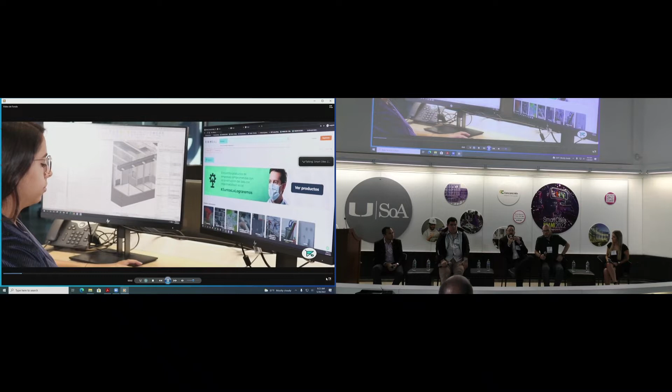So Bimbao is using BIM to be able to, from the beginning of the project, from the design, match the components, the BIM objects, directly with providers and vendors of construction materials. What we do is have a big database of vendors that are continuously feeding accurate and updated information about every material, providing real-time data for decision making. We are trying to achieve a point where even architects and designers are able to impact the process of the design and the result at the end. What we're doing with BIM is integrating the real information that flows through our platform, which is part of it—it's an e-commerce, a marketplace that connects everyone in the design phase. The important thing is that we are connecting everyone from the design phase, so vendors have updated information from the design phase, constructors and general contractors also have information from the design phase, and we're giving the power to architects and designers to help make those decisions with data.

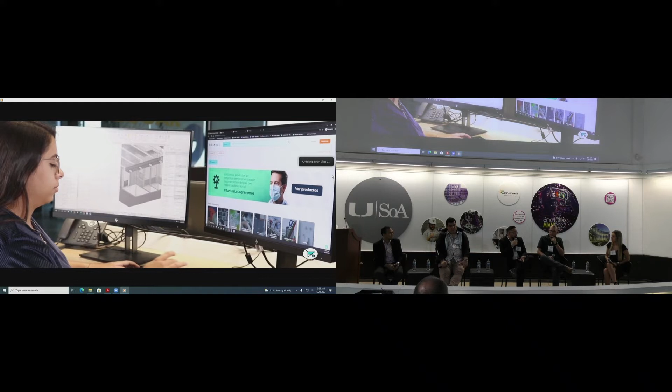I would say that one of the biggest challenges we are facing nowadays is that the quality of the information floating around the web—I'm sorry about the word, but it sucks. It's just not enough for making decisions. We have seen BIM objects that are literally boxes with just height, width, and depth, and that's it. With that information, we just cannot do anything. So it's become part of our mission to improve the quality of information in every BIM project, with high-quality data. And with that data, we are helping everyone in the supply chain make better decisions.

That is very interesting.

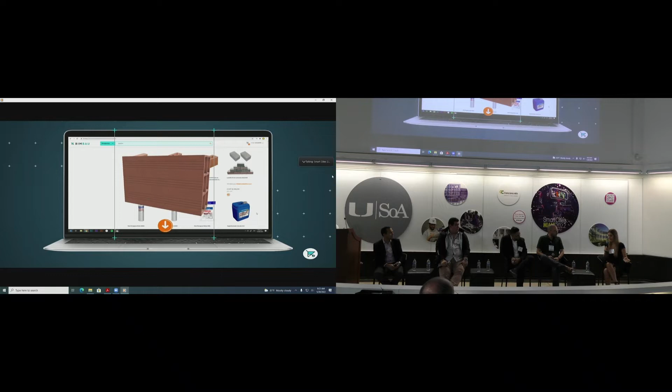When you say you connect everyone from the beginning, and all the parties basically start from the design phase, I wonder, and I want to hear Jaime's opinion on how Forge can be used as a platform on this, and then what are the applications that you see that the industry is adapting to, that Forge can supply and provide, and which ones are they struggling to adapt to?

Yeah, sure. So for those of you that don't know what Autodesk Forge is, it's basically a web service platform that we develop at Autodesk in order to tap into the CAD data. This gives you the opportunity to interact with either construction data, manufacturing data, or even a combination of both. So we have different kinds of services that allow you to do visualization of this CAD data directly into a browser.

When it comes to the digital twin side of it, we know that we can take, for example, a model of an already designed and constructed building, and then just start looking into the data that comes in from a combination with IoT, a combination of machine learning, start learning about how the building itself is behaving in order to let us know and do predictive risk analysis in order to interact more with this data itself. And going back to my previous word into the digital twin side of it, with efficiency, right?

One of the biggest challenges, I guess, that we see now in the industry is, like Bimbao mentioned, the lack of data in some of those objects, but sometimes also the amount of data that a certain kind of object ends up having is way too much, and then we end up with a lot of data that's actually not necessary for the development of it. So I'll say there's a way to keep it simple and then represent all this process directly into a CAD model itself.

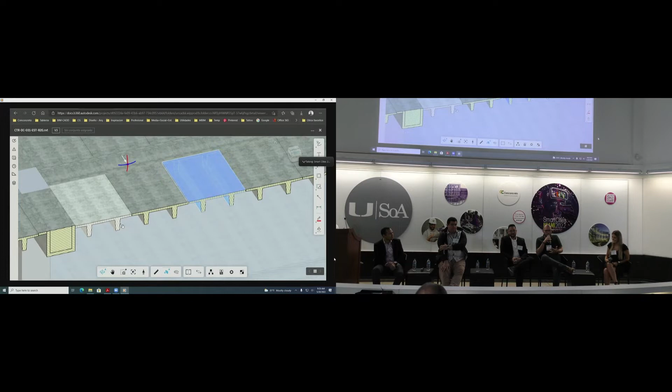Yes, and our biggest challenge with this technology is not about technology. It's about the way we approach the project. This is the important thing about this, because the technology is only tools to take the best decisions for the project. But our biggest challenge is how we approach this project, because normally we don't see the project as a project. Maybe it sounds obvious, but when you think of an architect, this architect is thinking only in his drawings, in the space, in the aesthetics of the building, but doesn't think, for example, about the operation.

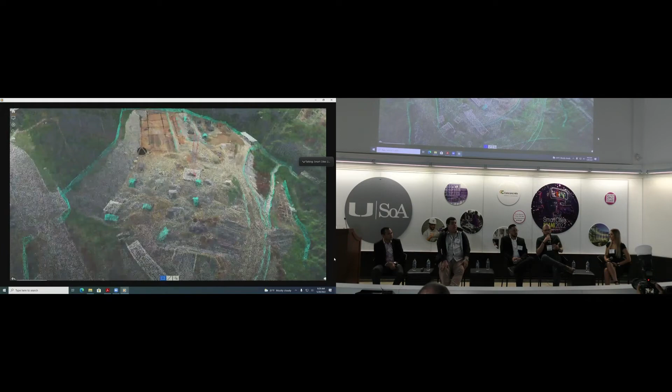Sometimes they don't think about the construction side. And it happens with all the specialists. Every specialist, the mechanical, the electrical, everyone is thinking in his part. But no one is connected. They work as an island, right?

So our biggest challenge is to see the project as a project, because maybe I am an architect, but I have to think about the construction side, about the budget, about everything. Not to be an expert in everything, but my part has a big impact on other parts. So yes, there is technology, but if we don't start to think in these situations, this technology, like Andrew said, is just garbage data, right? We have to start to think in a more integral way around the projects from all these sides.

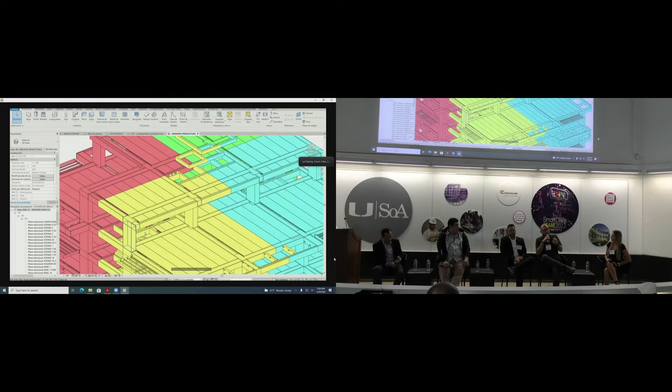I think this is our biggest challenge, yes, to start to approach the project in that way, because only in this way will BIM be more important, because BIM is always focused on the modeling, right? We are just producing 3D models, 3D models, but this is just 3D information. We need to start to focus on the information, because it's this data that is important for the digital twin.

That is very interesting. It sounds like it's just the beginning of something that could be way more connected, which is very exciting for the construction industry, and it's definitely lacking right now.

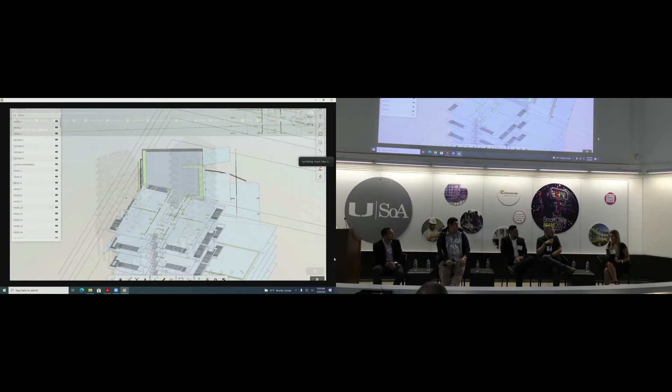Right. So something that all of you mentioned is the word tools, right? How this is a tool. So I want to ask Julio with Autodesk, what are some of the tools that Autodesk either has or is developing to implement more BIM in digital twins? And why should anyone, from the designers, architects, engineers, to the contractor, owner, or even the end user, choose to use them?

Okay, I will start with the common platform. We have been really connected with ISO regarding BIM, and we are really committed to the common data environment. Our first approach is to provide the common data environment, which right now is Autodesk Construction Cloud. It's a big repository where you get all your data and information of the project from the very beginning.

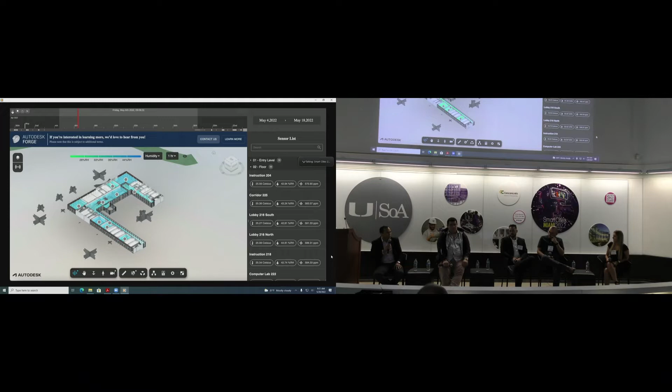At the very end, on the opposite side, we have Tandem, which handles all the operation and maintenance. In the middle of that journey, we have the authoring tools, like FormIt for the very early stages of the project, Revit for all the detailing about architecture, structure, and MEP systems, and others regarding site design, like Civil 3D.

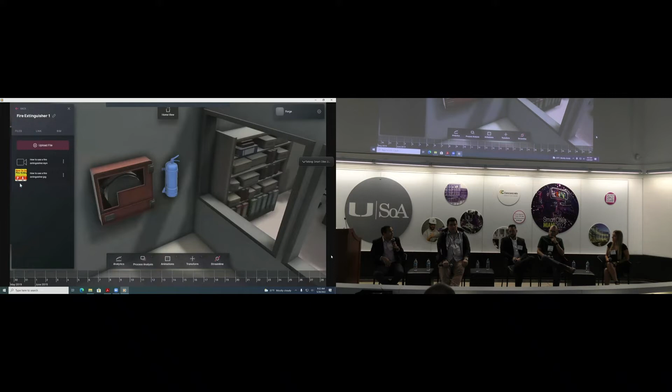And finally, you manage all the pre-construction and construction phase also in Autodesk Construction Cloud. That is the common data environment, so that's kind of all the environments of tools regarding Autodesk.

That sounds pretty exciting. So where is this all going? What's next? What's the future of BIM? What's the future of the construction industry? Do any of you have a vision to share?

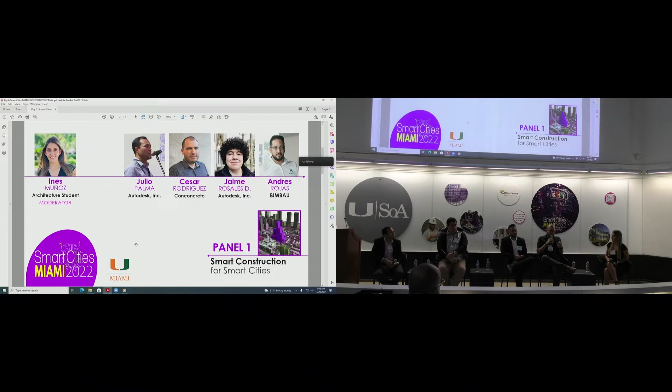Okay, maybe I'll start. I think what BIM is doing to the project is we are planning better. With BIM, we design better, build better, and operate better. I think this is the challenge, this is the future of BIM. Already today, we have really great tools. The challenge is how to use these tools to get the right answers.

When we talk about BIM in our company, we like to think of the last part. What are the answers we want to respond with BIM? It's not about starting to do a lot of 3D models, rotating and nice renders for meetings or something. It's about what we want to resolve with the BIM models. For us, this is the important part. With BIM, we can do everything we can imagine, but we have to start focusing on what are the problems we have to resolve.

And these problems are always different for each building. For a building, maybe it's important to control the mechanical system. For others, maybe it's the budget. These are the answers we have to start to formulate, to focus the BIM in that way. For me, this is the biggest challenge, because the tools are there—it's the way we are going to use these tools.

Do you think it's going to be a long-term thing where even once the project is done, it can be used to maintain the building or to track data for the future? I don't know. I think it's important to start to construct this methodology to face this part of the operation, this part of the building operation.

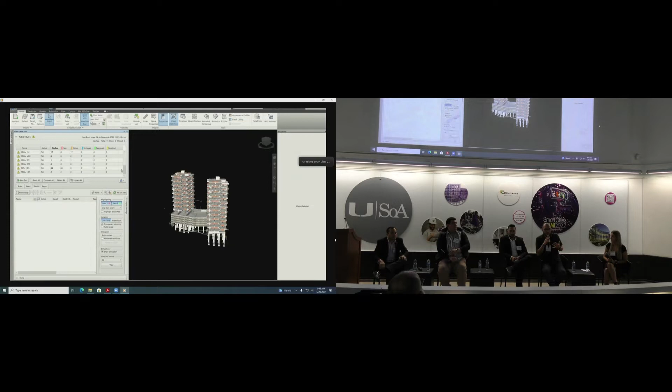For example, this is the normal exercise you see about design coordination. But for example, this colored model is the programming of the project, the time of the project. And we can do this only if, for example, the programming expert sits next to the structural designer, because there are decisions they have to take at the same moment. So this is important for us.

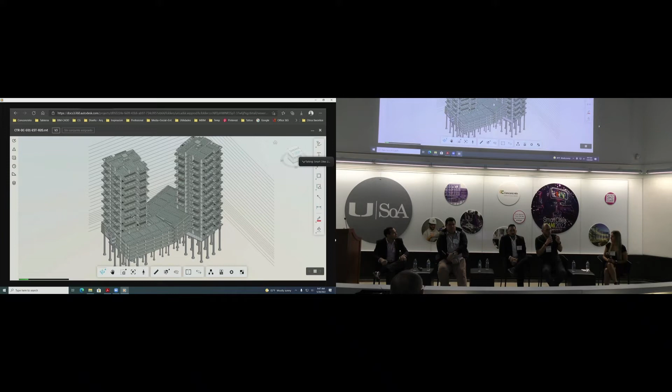And this is what we start to see, BIM as a database, but for all the life cycle of the building. Not a BIM model for the architect, not a BIM model for the structural, no. This is only one project. Maybe it's composed of several BIM models, but all these BIM models have to talk to each other. It has to be articulated.

We have to permit important decisions, not only design decisions, not technical decisions, but also business decisions. This is important. If BIM allows us to take that kind of decisions, for us this is a big step we've taken for the construction company.

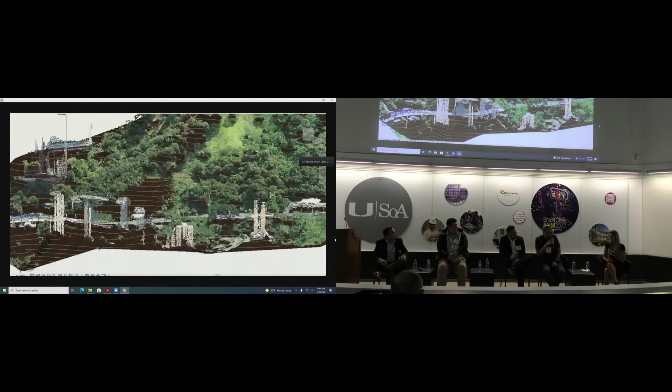Have you always used BIM, or was this one of the first projects that it started like that?

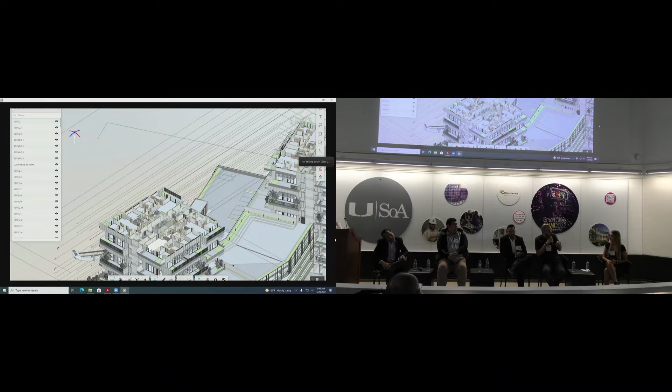I have to say we use BIM in almost 100% of the projects, maybe 95% or something. When we don't use BIM, it's maybe because it's a very old project, but in our company we use BIM in every project. And we are starting to use it in the construction part. Almost all the projects already have BIM models. Sometimes we have projects from external designers, so even in those cases, we start to transform this external information to BIM to integrate it into the construction part. So yes, we are very focused on using BIM in our projects, but not only 3D models - to take decisions through BIM.

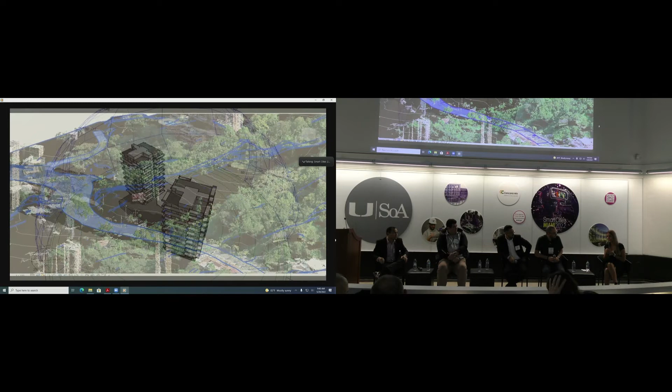Yeah, that's pretty cool. 95%, that's a big percent. You can say you basically use it all the time.

And how about you, Andres? Do you have an example of how you've used BIM and how it was beneficial, or saw the efficiency compared to other projects you've done?

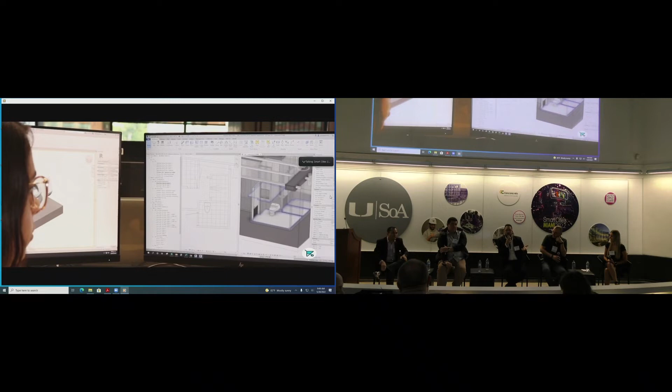One of the rules in Colombia for construction is that we never end the projects on time and on budget. And one of the important things is that with BIM-BAU, we have 200 active projects, and the projects that started and finished using BIM-BAU as a base, they finished on time and on budget.

So it is not the future. This is something we're doing right now. We are improving the performance of projects today. And even with BIM, and I was talking to you earlier about data quality, we have partnered up with Autodesk, and we are using Revit to do this.

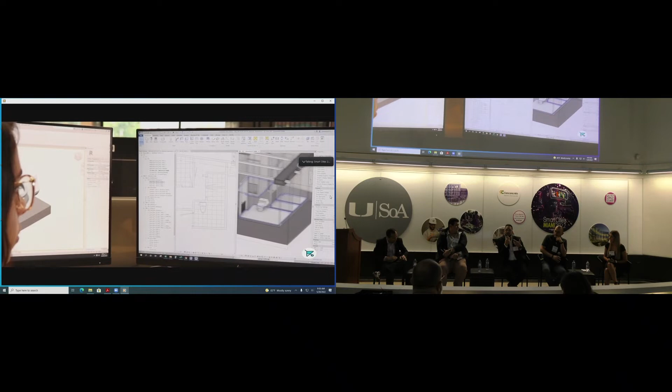We already have an alpha release of a plugin that is going to allow architects and designers to download the best quality BIM model information. You can visit revit.bimbau.co and register there, and find the best quality BIM objects. So it is happening right now. We are doing it right now. We're changing the way construction is happening in Colombia.

We're about to move to the US and start working with the same goal here. And BIM has been a huge part of that improvement in performance.

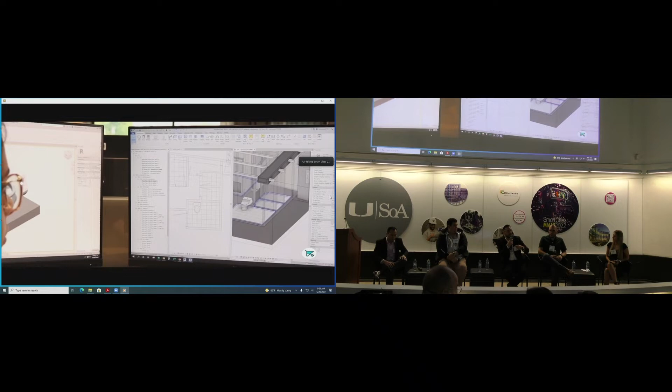Do you use the buildings where you've used BIM and then go back and study the data for future projects? Has there been that implementation? I think that is one of the biggest things we do not see today. We see BIM and digital twins as something linear, but it is not - it is a loop. It has to loop back to feed the next project, to feed the information about the things we missed, the things we did right, the things we did wrong, in order to continue improving the efficiency of construction.

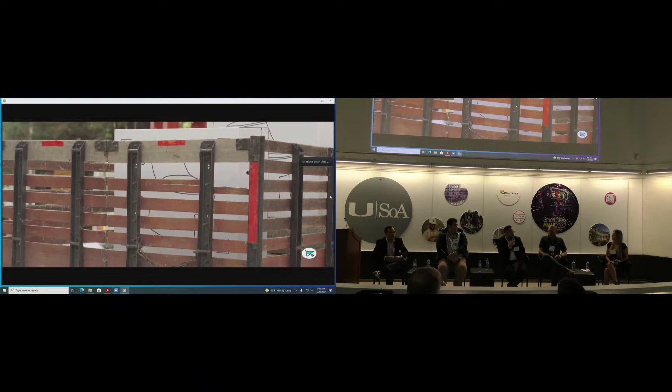So with this kind of thought, we are gathering all of the information from the projects going through the platform in order to make data science and artificial intelligence models to help better decision making with data.

That's pretty cool. How about Autodesk - is there any tool you can use to analyze the data that comes from BIM? With what Bimbau is doing with the Revit plugin itself, we have services now to basically allow you to do all the same, but completely outside of Revit, just running directly on a cloud-based engine.

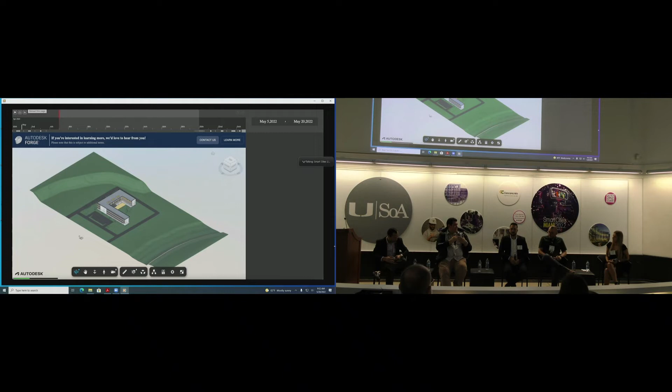Definitely, there are tools that help you analyze this. We're looking into a lot of machine learning as well, for automation of analysis of the data, in order to pass that knowledge on to the next projects. I'm pretty sure you'll see some of this coming up at the next Autodesk University - it's going to be in New Orleans.

So it's kind of close for you guys. So when is it coming? It's at the end of September. Yeah.

So I guess just to finish up and wrap everything up, I have a final question for all of you, which is: what can a young professional such as a UM student do today to start using these tools and be one step ahead of the construction industry, prepared for everything that's coming?

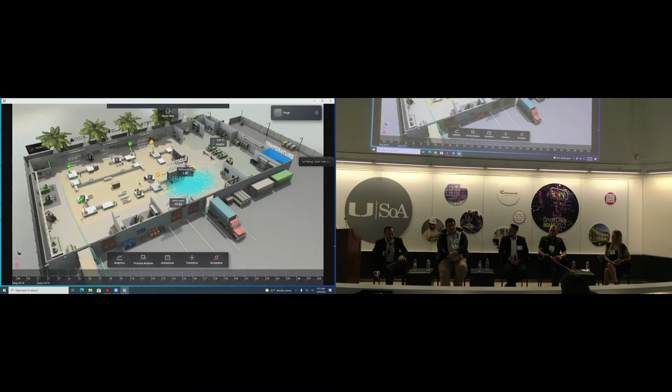Let's start with Julio. Okay, I would say that when you face a project, it doesn't matter what phase you're involved in, think with the end in mind.

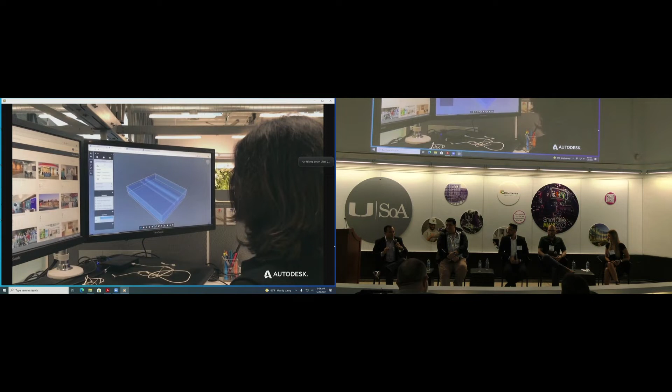Think with the end in mind, trying to identify what data you are going to use and what data you are going to deliver, in order to make the decisions and the analysis that will provide you with that data at the time you need to deliver it.

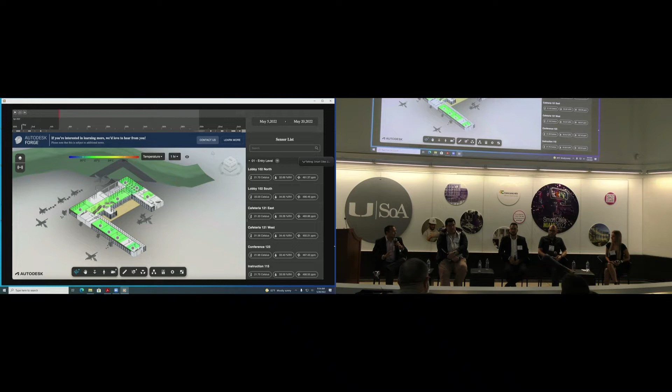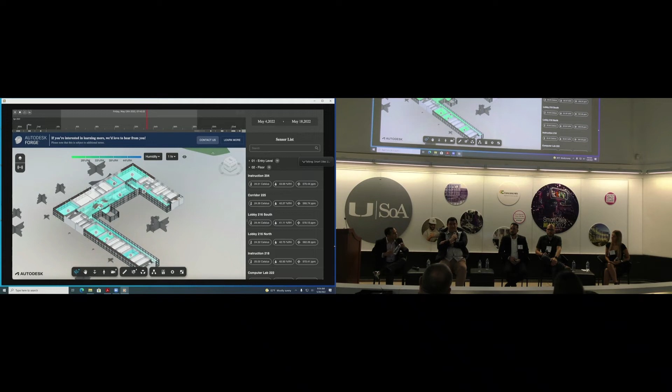I'll say this to a young professional, like I was talking to myself 10, 15 years ago: be curious. Curiosity itself can take you a very long way. Even if you start on a certain path in your career, curiosity can lead you to new solutions. I've interviewed amazing software engineers who started as architects, but came into the company with knowledge that a pure software engineer doesn't have, because they knew the industry well, like an architect or civil engineer.

So be curious, even if you think you're not on the right path because it seems to be taking you away from what you studied. For example, you were a mechanical engineer, and then you came into construction, and now this is where you are. So in some way it was part of your curiosity to understand a different world at the same time.

My advice would be: be a rebel. Think differently. I know it sounds cliche, but we're at a stage where we need change, and we need it quickly, we need it fast. It's in your hands to take action, and that action comes from using the tools.

I've been selling Bimbao for about 1.5 years, and it's almost unbelievable how much pushback we get from more seasoned general contractors and developers. So it is in your hands to use the tools, think differently, and start making the change. If you don't start making the change, it will not happen by itself. Otherwise you're going to see other people doing amazing things while you're just sitting there watching. So be a rebel, be curious, be the change.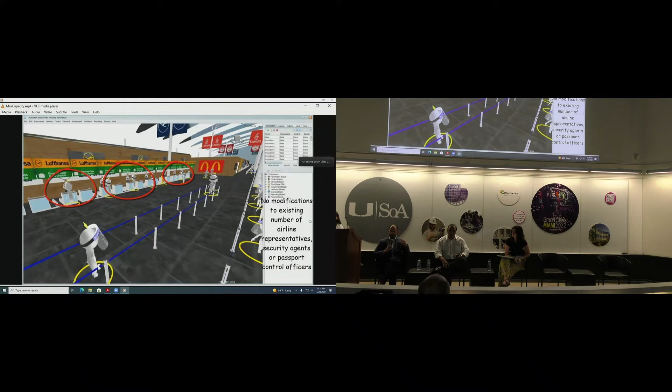So I think simulation is a very powerful concept that, using the tools we have in place today, allows us to improve our behavior as a community, as human beings, in a proper way. Basically, simulation means you have an effect in life. You have the behavior of a human, the behavior of a truck, and this behavior is ruled by several mathematical patterns. So you understand this behavior, you put that behavior into a mathematical expression, and with this tool that reflects what is happening, you predict the future. For example, you have a wife. Your wife behaves in a certain way.

So you create a mathematical expression to describe your wife's behavior. Now that you have that expression, you can predict what she's going to do next weekend. For example, if you go out with your friends and your wife becomes angry, you have a mathematical expression that says once you go out with friends, your wife gets angry. So you can predict what's going to happen in the future when you go out again. That's simulation, but in a more complex way.

Great. And what kind of data is used to run these simulations? What kind of data is pulled to be able to run them?

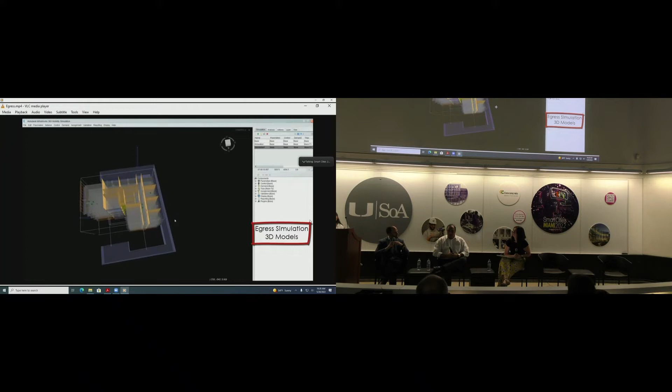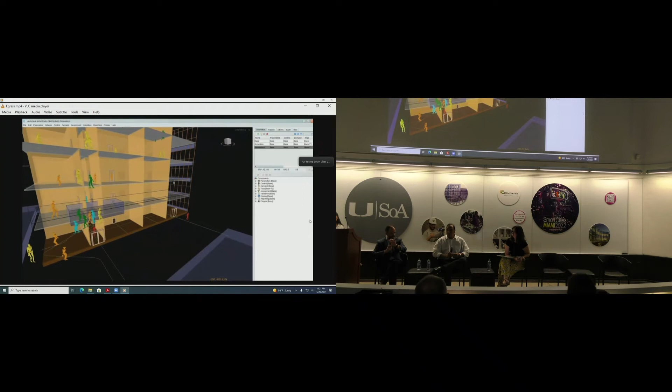You predict the future based on the quality of two things: the quality of the information used to build the model, and the quality of the model itself. The more you check that model against your wife's actual behavior, the better your prediction becomes. That's why it doesn't mean that more data is always better. It means you have to choose the proper data according to the level of the model you're developing. Huge models with small data give a bad prediction. Small, simple models with a regular quantity of data give a much better prediction.

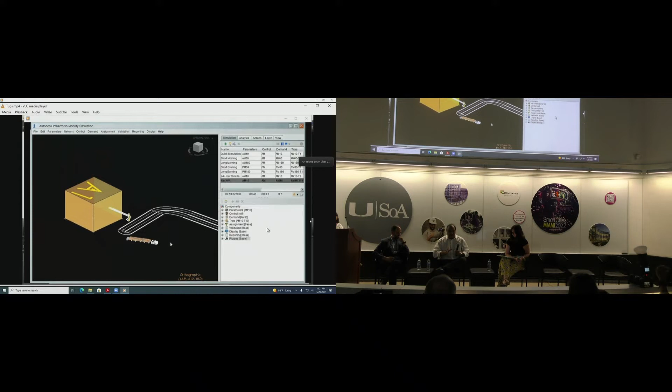It is to create a model. Based on what? Transportation networks—roads, number of lanes, turning movements, signalization, traffic light patterns, the phasing of signal groups, the greens, ambers, and of course the reds. All of that data is simultaneously modeled.

Plus, the most important data is the annual average daily traffic, the most important thing when analyzing a transportation network. It means the volume of traffic divided by 365, and based on that, it gives you the peak hour traffic data you need to model in order to contemplate the worst case scenario. Every single state in the United States holds that AADT value, which you can plug into a matrix, and it gives you the true behavior at the worst time, or the peak hours.

Let me complement that. I think today governments—municipalities, counties, states, and national governments—are much more concerned about taking proper data and using it. We can see, through a lot of initiatives, how they are measuring and registering the specific ratios Edmundo was just describing. Super interesting.

And when modeling traffic patterns, from your experience, how do these simulations affect a public transportation line and its connection to other modes of transportation, such as pedestrian traffic? We've seen, during the last 10 years, a lot of initiatives all over the world trying to connect different modelings, each describing different behaviors of different transportation types.

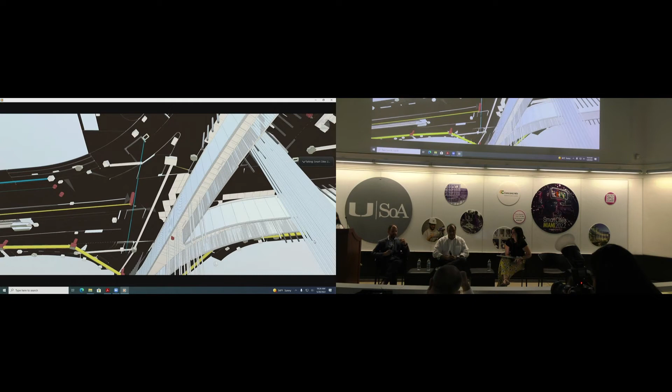The Madrid International Airport, T4, the new terminal—when they started designing that terminal, the base of the design of that multimodal system was done based on predictions for the next 25 years. When the terminal was finished, the public did not understand why such a huge terminal was built, or why the train station below the airport was so huge. Today, 10 years later, we now understand. We've seen how those models became reality and how the size of the terminal is actually being used properly.

These predictions help the government invest properly and avoid further investments due to unexpected use of the multimodal terminal.

Okay, so for bus routes and train station routes, there's an open mobility database that you can plug into anywhere in the world. You plug in all the traffic, bus routes, or train routes into your model, and automatically you have the stops and the existing routes.

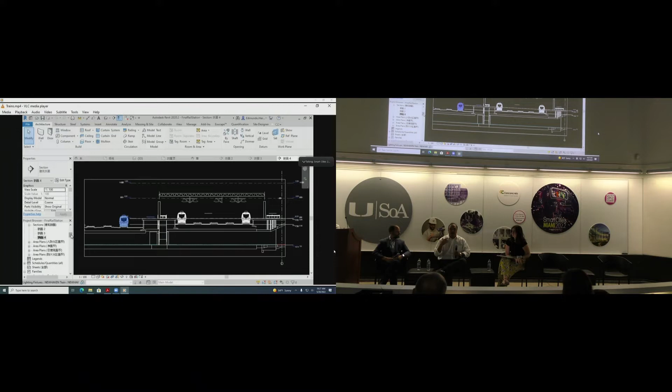The highway capacity manual has level of service A through F. If it's E or F, that's collapse of the network. So you can see all the bus stops that are going to be collapsing, and you evaluate whether you need more frequencies or not. If they're extremely empty, or you don't have as many people, you can visualize this in a contextual, single, georeferenced model. So you evaluate and optimize which frequencies are needed or which need to be more spaced apart. That saves so much money, and that's really planning.

Public transportation with microsimulation. Wonderful.

And we typically hear about how companies are moving towards the creation of self-driving cars, Tesla's autopilot, and all of that. How does the introduction of self-driving cars into the daily use of people influence the creation of forward-looking solutions?

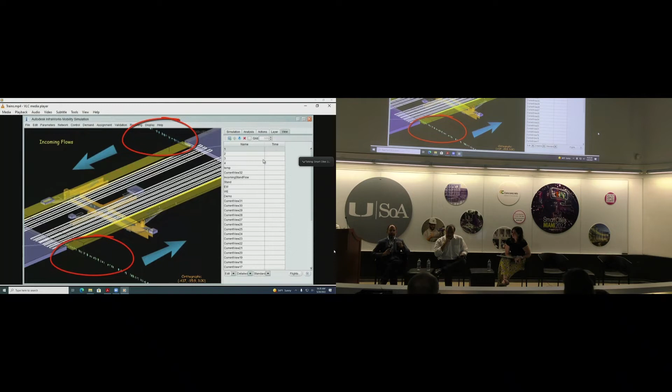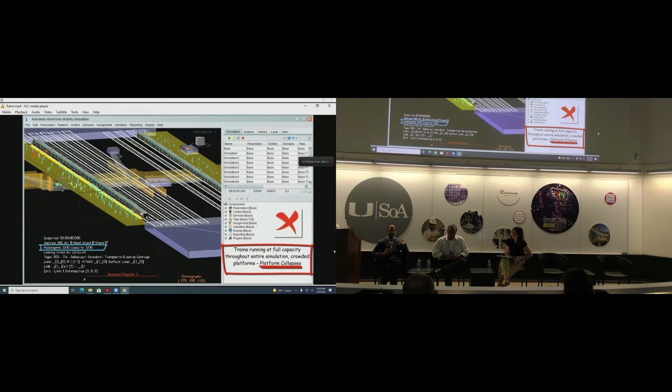I think today we are living a very interesting moment in history, because all of us are connected through a mobile phone, and we are sending our location, our intention, every single minute to a cloud. When you take a car and put in your GPS, Google Maps or Apple Maps tells you which street to take to get to your point—you are sending your intentions to a cloud. This information will be super powerful to governments or companies that compile all of that and are able to understand what's happening in each moment in a specific region of the city.

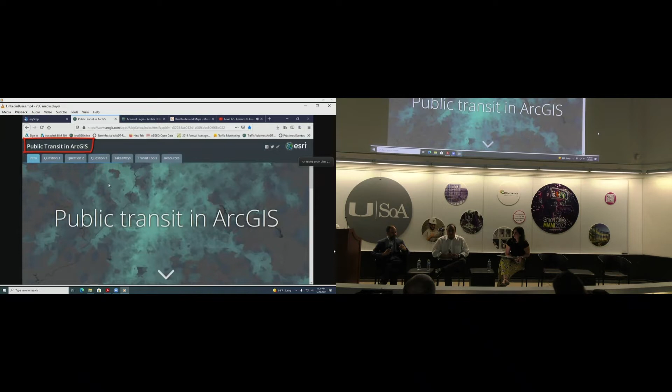So when you have that information and add cars that are able to move by themselves, you're going to be able to use those streets or areas that are less dense at a specific moment and direct those cars through that area. At the end, what we're foreseeing is that governments, using partnerships with companies that have the information, will be able to use all the current infrastructure much more efficiently, and will be able to manage better and offer citizens a better quality of life.

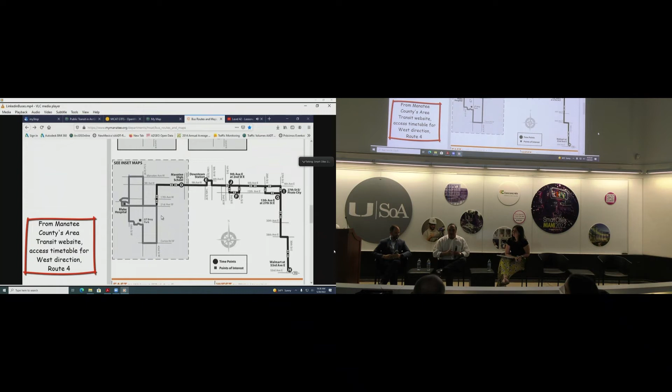Okay, I honestly believe that fully automated vehicles are not going to exist ever. It is going to be a coexistence of humans and, of course, very controlled autonomous vehicles. Yes, we know about what China is doing—they've made inroads in semi-autonomous vehicles, and it's going to keep moving forward. However, I truly believe that yes, those will exist and eventually will take place in our transportation networks.

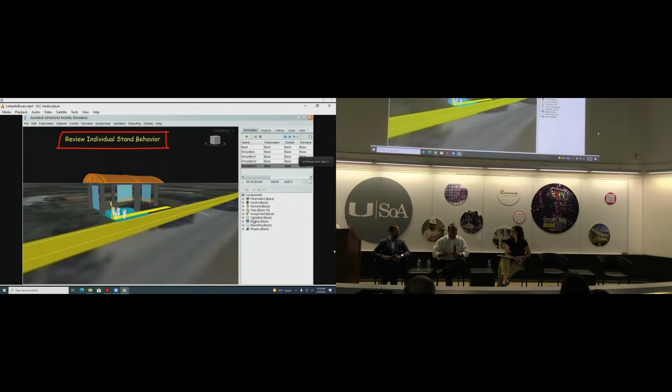But there's got to be huge infrastructure to start limiting, especially for freight. I see it for freight concept in the future, moving in a very, very controlled environment. So it's the coexistence between humans and very controlled autonomous vehicles that's going to alleviate densities and increase the level of service. It's going to be much better, especially with humongous freight transportation systems like trucks, but it's got to be controlled. There's got to be heavy investment in infrastructure to start limiting and minimize the risk of accidents between autonomous vehicles and humans.

So would you say that they would be in separate infrastructure, or would it be more of a combination between human-driven transportation and autonomous transportation in the same region?

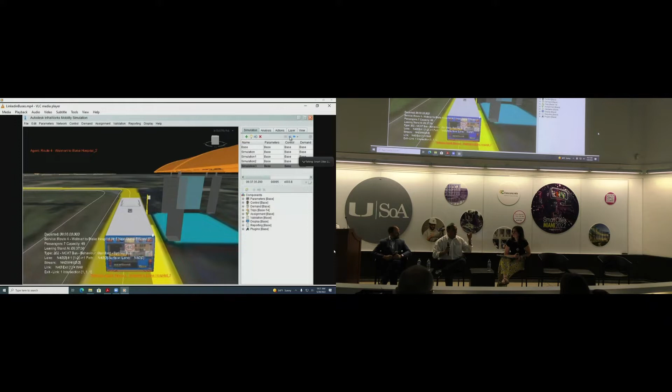Like HOV lanes—that's exactly the way I see it. You run by them, but of course there's got to be a barrier wall. It's like HOV lanes right here on 95, north or south. That's exactly the way I see it, but it's got to be infrastructure just to limit that.

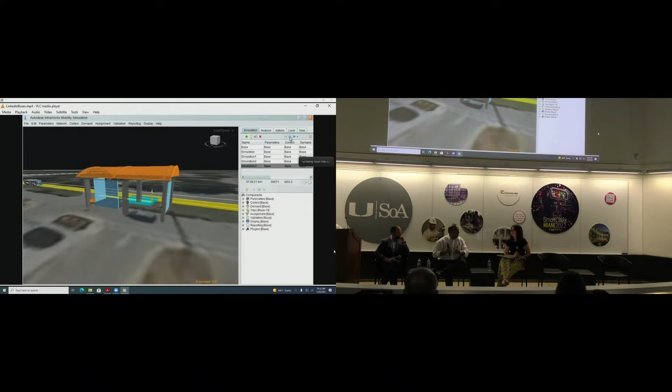I saw once an example where an autonomous vehicle stopped because a person had a stop sign on his back. So just that factor shows it's not going to be able to handle it on its own—you've got to be really careful and really start building infrastructure for that. I see it coming, of course, but it's like what we see now as HOV lanes here on 95.

Wonderful. Or the state of Florida, for that matter.

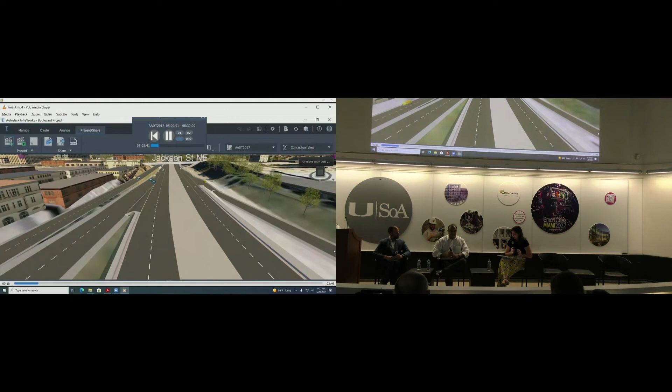Super interesting. And since we're talking more about future and forward-looking solutions, we often hear AI is the future. How could AI learn from these simulations and all of the patterns that you input into it, and be integrated into city infrastructure to better on-ground traffic in a more simultaneous way?

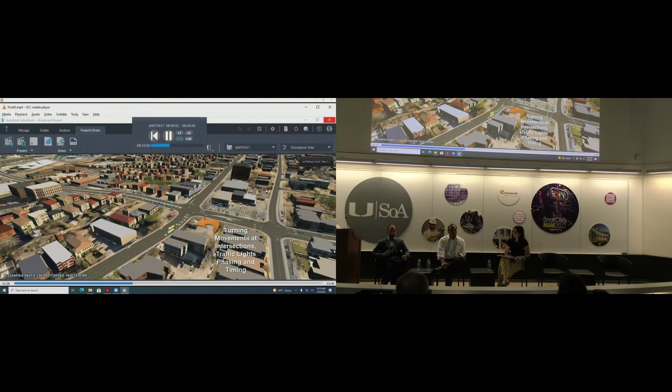I believe AI is a very powerful tool for governments, because the data is there. At any moment, at any specific time, governments have all the information to know what's going on in any space of their city. So connecting that with a tool that's able to take decisions instantly is a very powerful tool to improve the service that a city is giving to its citizens.

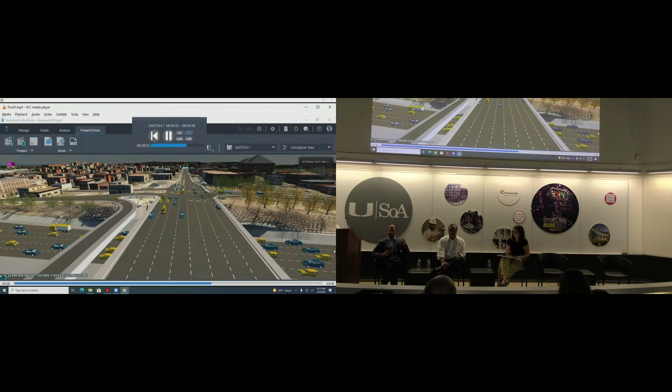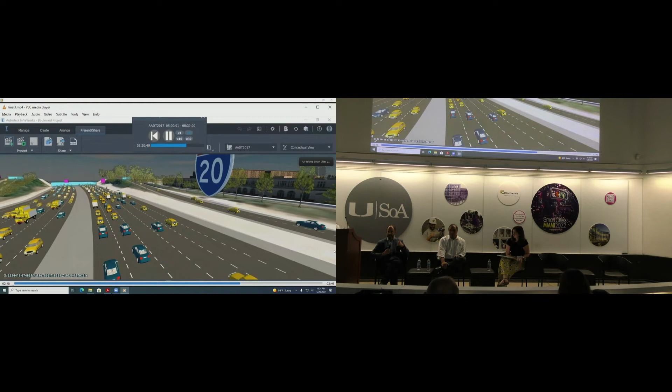For example, rush hours going to Brickell in Miami. So if you, as a city, read all the information that Google Maps or Apple is recording through all the GPS, and you are able to control the lights, control the police, control the exits in and out of all the highways, you are going to be able, through a very easy AI model, to take decisions about how to manage the lights, how to manage the access, and improve the quality of service that you are offering to your citizens.

So I think this is not a NASA thing. The tools are already there. I think the information, of course, is there. I think what is needed is more leadership to organize and leadership to put that in place.

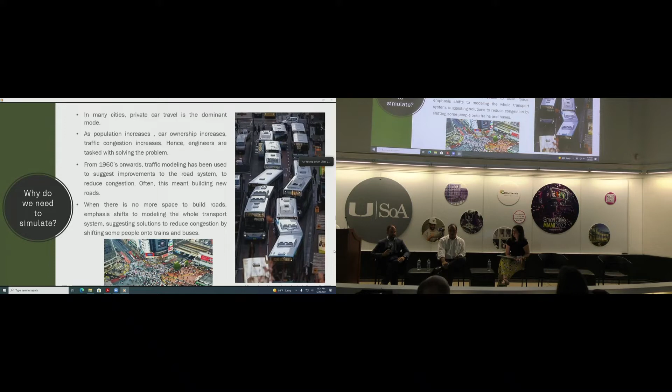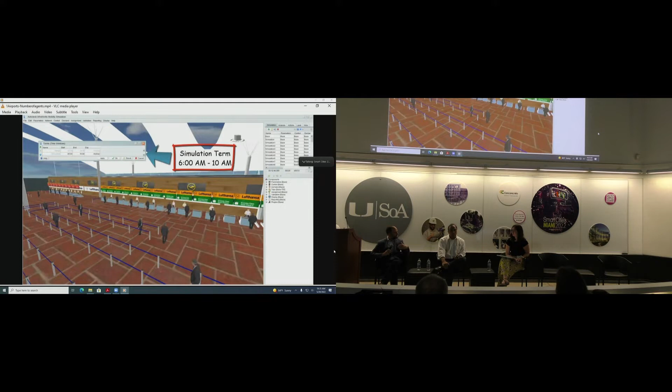And actually, we've seen specific movements in that way. The city of Coral Gables, for example, is recording all the projects that are done in BIM modeling, and they are locating all the models in their GIS platform, so you can access that information at any time. So I'm pretty sure the cities in South Florida are very concerned about the problem, and they are aware of the solution, and they are taking steps towards that kind of solutions.

Yeah, along those lines, I see artificial intelligence being a key part in traffic lights. So what it does is it scans which lanes are empty, and then the phasing switches, from a complete stop to a yield or a go mode. So those intelligent decisions that traffic signals can make, that's where I foresee artificial intelligence.

Now, can you model it? Can you prove to the state, or to city planners, that this is indeed much more efficient? You can, because in microsimulation engineering, you can place controllers at the intersections, and controllers say, okay, if there is a gap, or if this lane is unoccupied, then switch the traffic signals. So immediately they see the benefits.

Why? How is it measured? By computing the level of service. So if it's a level of service A through C or D, it's good, it's much better — the improvement is better. So there are ways to prove it using microsimulation by placing controllers.

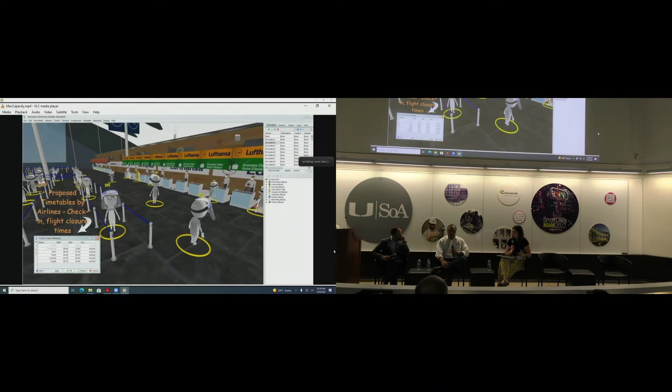Wonderful. And Daniel, you've mentioned the occupants and the citizenship of a city several times already. What would you say is the role of the occupant in all of this? In moments where efficiency and the comfort of the population clash, how would one go about finding the balance between the two?

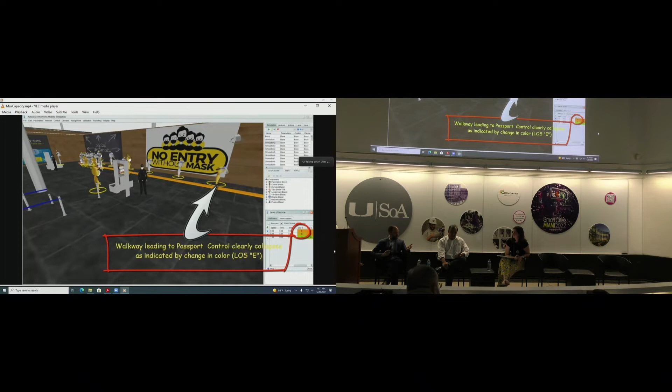At the end, in infrastructure, you are trying to improve the quality of life of people, you know? Either if you are designing or building an airport, developing a highway, or doing a train station — this is the final goal.

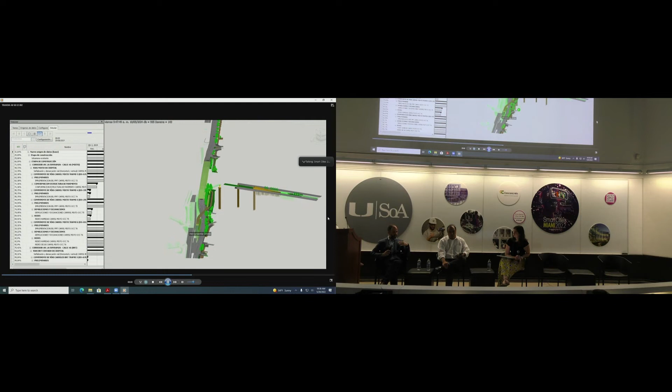However, you can do that with a time frame that allows you to do an investment with a size that is available and real for the city or for the state, or you can do that in steps in order to go towards your goal. What I mean is that if you have a plan for 20 years as a city or as a county, and you want to improve the quality of life of your citizens towards a specific level of service, you have to do the proper investment in the proper moments.

To do that today is much easier, because the data available is very accurate — all the mobile phones, for example, provide location, timing, behavior. So the quantity of information we have in order to check our models and to teach our AI is a powerful tool that governments must use in order to take those decisions, to decide where to put the investment and how to do that.

The way I see it, of course you're not going to be able to resolve and make everything a constant flow. Space is limited and there are so many variables, and that really affects the frustration or satisfaction of users. However, what you can do to balance this is...

Really compute, and that's what microsimulation does. It computes levels of service at the intersections. Granted, not everything is going to be constant or level of service A, but you might say on this major leg of the intersection I'll have a level of service C, on this one B, so as long as the master plan for 20-25 years holds a level of service C spread throughout all parts of the intersection, you'd be fine. It's balancing all the levels of service within a single intersection so that the combination gives you at least a B or C in the long run.

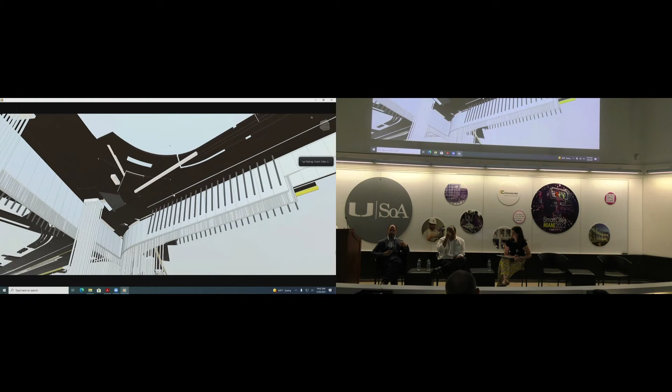Here we have the same situation. We have amazing tools ready to go, millions of quality data. What is needed is the proper leadership to get consensus between the community and work towards the same goal. It's the human side that's not a problem, but it is the key element in order to advance as a society.

You can see the cities, or the utility companies, or the utility providers that have a strong leadership or a strong union between the private side, the industry, the government, the academia. Those places with that kind of leadership and union are the regions able to advance faster in the improvement of their urban or transportation services.

I agree, communication is paramount between the developers and the city. They should communicate much more efficiently, establishing routes so they produce minimal impact during construction, exactly understanding where all the concrete trucks are going to be. This happens in the airport all the time, with specific gates and planning of construction trucks at critical times. They should say, this is the best time, this is the best window, these are the routes you should take so both of us benefit, for sustainability and improvement, maintaining at least the level of service—which is hardly done, and is really very complex.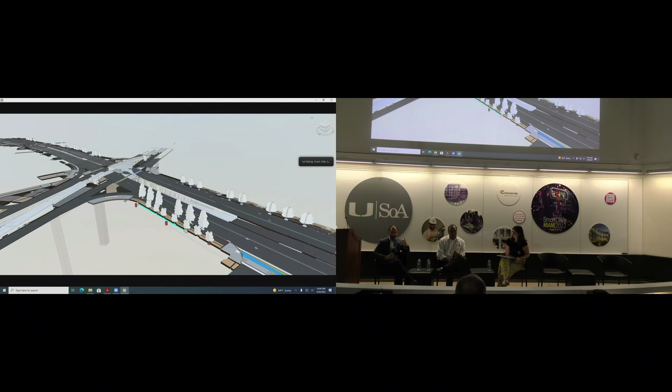Let me complement something. Coming back to the idea of leadership and the human side, the good news from my perspective is that in the USA, the DNA of the people, the culture of Americans, allows—from my perspective, having lived in Europe, South America, Russia, and the USA...

The Americans are - since I'm speaking as an American already - since we are very freedom-oriented people, we respect the other's freedom. So this cultural thing allows us to feel free to discuss directly with each other. I've seen developers speaking with cities, speaking with academia, with industry, in a way much more open than in any other place in the world.

If you go to Europe, for example, you have a code, a specific rule for the whole country. So it's very difficult to have a discussion between a developer and a building official, or academia with a developer, in order to improve how that code is applied to a specific problem. Even though Europeans may seem more open, their mindset is more about following the rules.

However, here you can see how a city joins forces with academia to improve a specific problem, or a city sits down with a developer to join forces on a specific part of the city. My perspective, after all my experience, is that American culture is one of the most important assets the USA has, because it allows Americans to join forces towards specific problems and do it better.

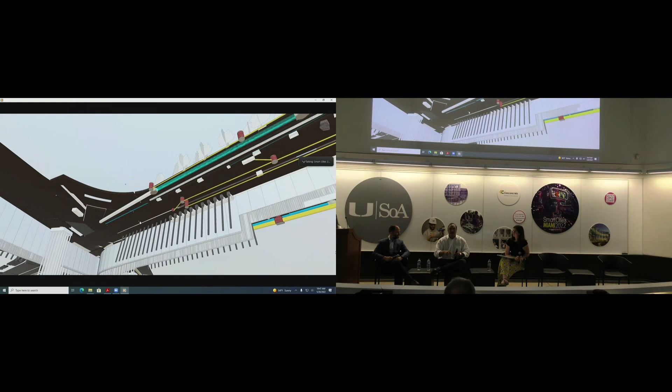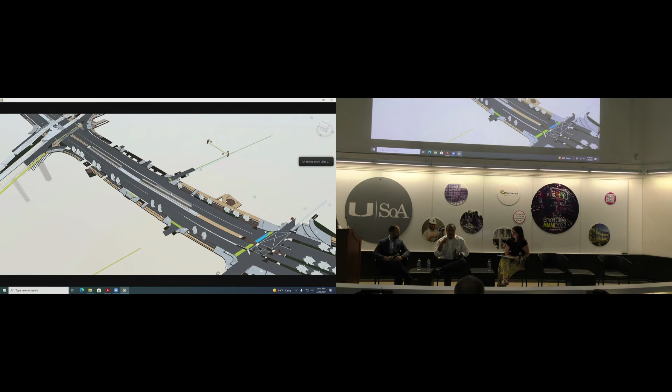Another one, for example, Vancouver Airport. Who would have thought that all those carts on runways - you see those carts - now, there was a big problem in Vancouver. I worked with Vanderlande in the Netherlands, saying, what in the world is happening? A lot of planes are not leaving on time. So we started studying why, and believe it or not, it was because bags were not being delivered onto airplanes on time.

So airports got fined. Also, what happens? Well, airlines had to really push it when they were up in the air to try to make up the time lost. So it was a traffic simulation of all these carts that made a difference. It said, you need another point of delivering baggage at critical times.

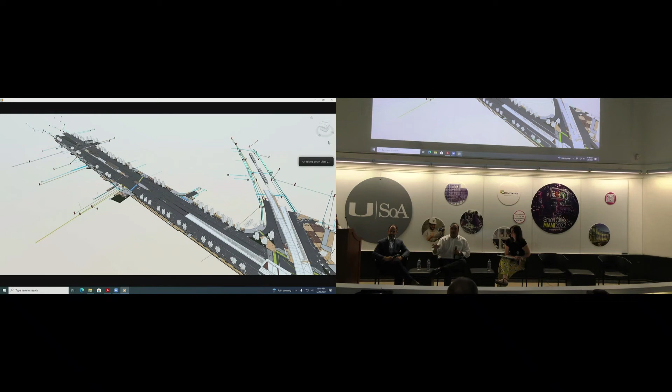Vancouver does that. Orlando - if you go to Orlando Airport, they just got a piece of paper saying 'go here,' and that's it. There's no planning. And of course, this problem will propagate throughout time.

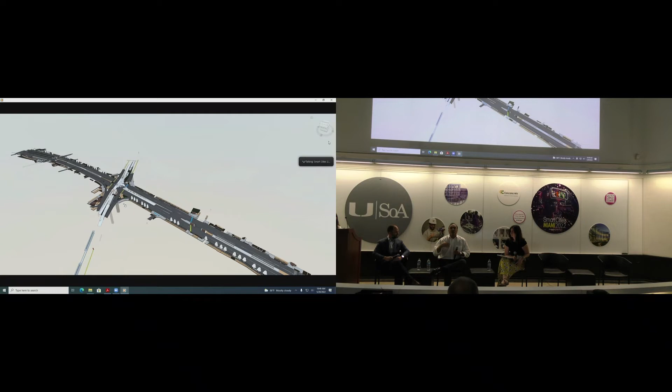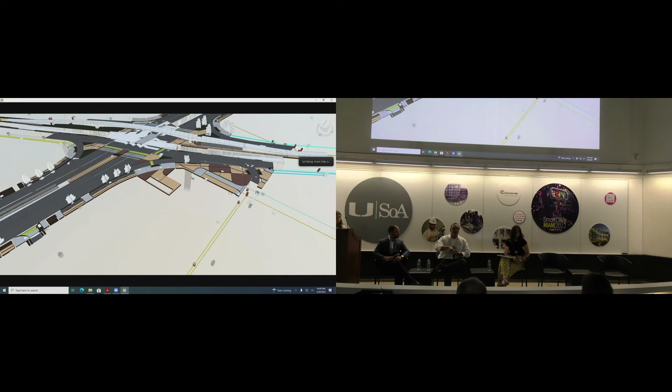Another critical one - airports in San Andres, Colombia. 5 planes, a mess on the runway. People were even standing on the runways trying just to get through customs. And then they tried everything - they even thought about building other buildings to withstand the flow of people. It was just a matter of diverting, believe it or not, one flight - not the one with the most passengers - and it worked.

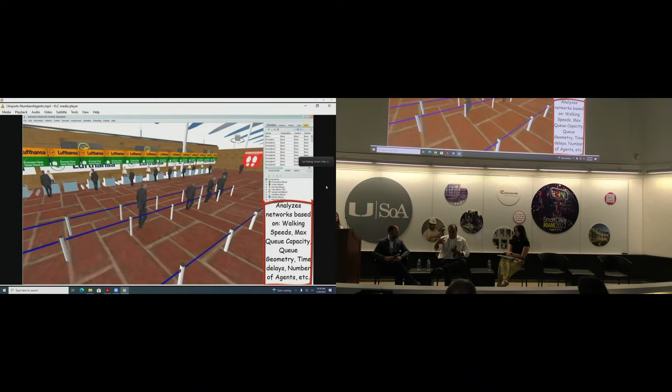So there are many more things - egress simulations. When you turn in any architectural project, the first set of plans are what? Egress plans. But they're based on what? On the construction code. Where's the reality in that? Because it's based on width of stairs, width of doors, in walkways - that's it. With micro-simulations, say okay, here we go - so there's an emergency, which also applies in airports.

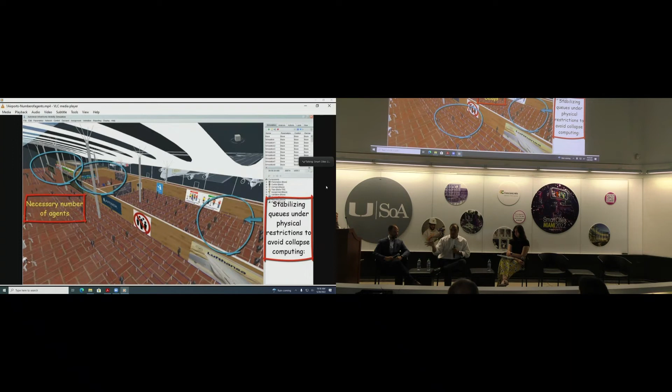You compute from all peak hours, the most number of people at a specific place. Once the alarm goes off, you compute up to the last person that leaves the building, because what happens if it's more than 3 minutes? Then you endanger people. Egress simulation is taking more and more force in this.

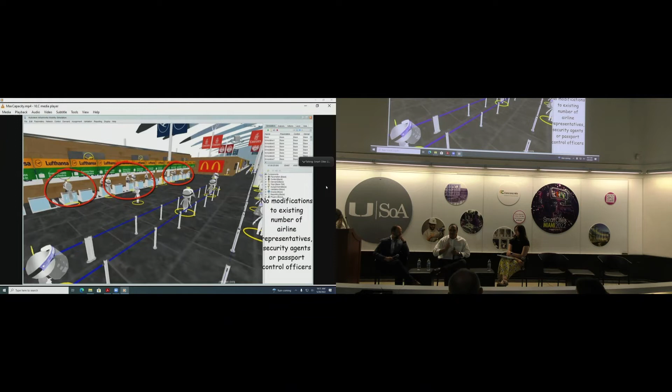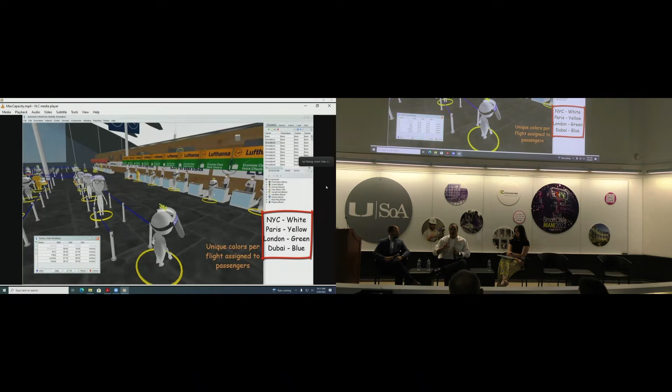And of course, the Manatee County example, which we already talked about, that was the bus routes and train stations. And in San Juan, Argentina, there were fatalities, 2 fatalities per month, because people wouldn't stop, would not really obey the traffic signals. So we fixed that by placing roundabouts. Instead of 2 per month, it became about 3 a year. It was drastically reduced just by placing roundabouts.

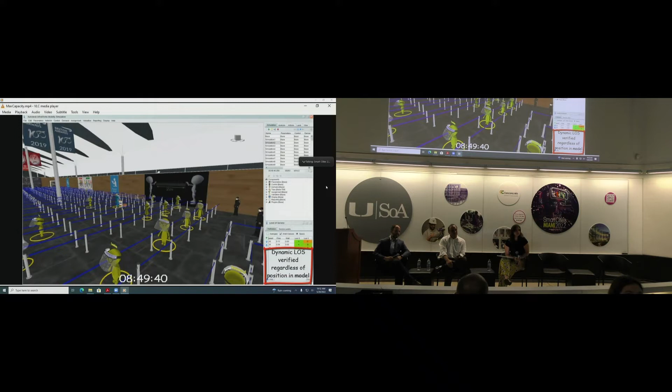A detailed simulation, how do you handle uncertainty? You mentioned people's behavior, right? Airline delays on arrival or departure, also there are human factors that create some uncertainties. So haphazardly, something happens. I think I understand that your simulation uses sort of a range of targets, you want to achieve between this and this, but there's also something unpredictable that could happen, and that unpredictability could depend on culture. Something could happen in Japan that may not happen in China, and vice versa. So to develop something that is globally applicable, simulation models, how do you handle those uncertainties?

Thank you for your question. When you create a microsimulation, there are agents. Every single agent has a behavior before you create it. In behavior, you put aggressiveness, and also the walking speed during normal times, and then you can run a variation based on statistics. So you can place all this, create behaviors based on the country, and then plug them into the profile which controls the origin destination matrix, and it creates those trips. Absolutely, it's called behaviors in microsimulation.

Computer scientist, and I have a master's degree in telecommunications, but I ended up running a construction company. And since the beginning, my challenge has been how to transform construction in terms of digitalization and digital tools to improve productivity in the construction industry.

10 years ago, we came across the BIM standard, and we started using BIM tools. We see this as the only tool available right now to increase productivity in the construction industry. There's close to 50% losses in productivity in the industry due to labor and lack of planning and lack of integration of designs. So we have been working for 10 years improving productivity, and we have many experiences, especially when the owner, the designer, the contractor, and the asset manager come together, and they look for strategies to improve productivity and to have less impact on the environment during the construction phase and also during the operation and maintenance phase.

We are shareholders in one of the largest real estate funds in Colombia, and we have developed close to $500 million in assets that are sustainable and have been delivered on time and below budget. So we can prove it works.